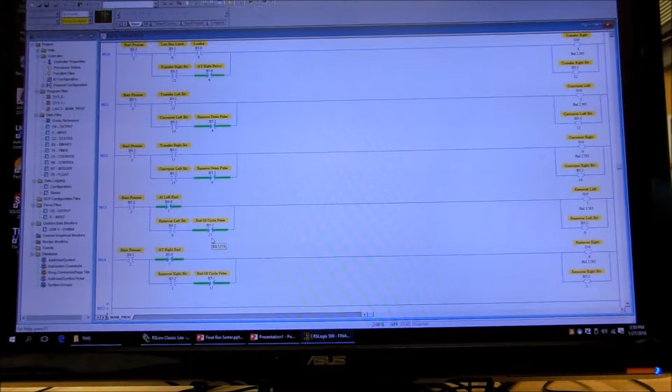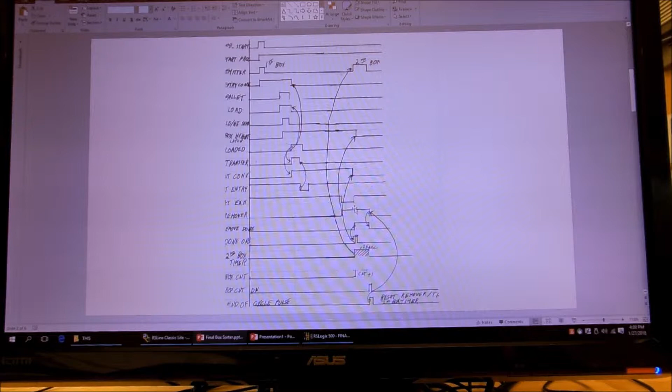Now, for the rest of this, what we have to do is say, okay, at what point do we say we have a remover on there? And if we look at this, again, the remover, we're going to keep this latched on, and when that at exit signal goes high right there, so they're both high right there, that's when we're going to say we're done. And so that circuit is just going to be when we're at the exit, and when we have the remover bit also.

Sure be nice if the Allen Bradley would cooperate a little better.

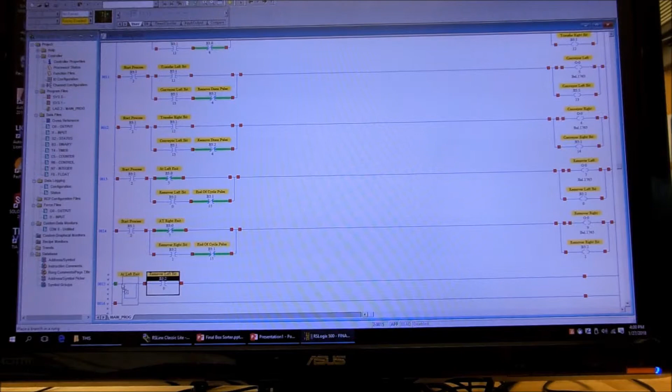And then it doesn't matter what, they're going to be a parallel branch because it'll either be left or right. So we can then say at the right exit and the right remover bit. And what we're going to do here again, now this is going to be a little bit different than what we had before because the signals go both high and low. So we're going to want to make sure that we're looking at the rising edge to be sure.

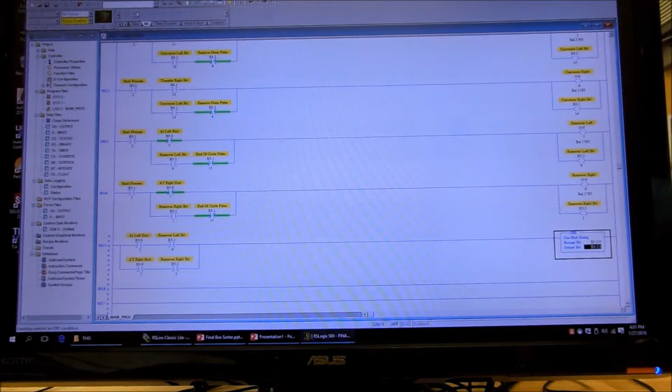And so what we're going to do is we want to grab our available bits. That's our memory bit. And the output bit is going to say, hey, that is when we are done, that's the remover done signal. So we're going to bring that down and use our remover done signal. And again, that's just a one shot. It's only going to be there for one scan.

And what we're going to do there is we're going to put in our counter circuit. And for our counter circuit, at the same time we're going to bring that over here, and then we'll move it into our output integer. So first let's set up our counter, and that'll be C5:0. Now our preset, we don't really care, so we'll just make it a really big number.

And then what we're going to do is we're going to move the, and remember, a couple people, it's nothing major, but remember, you're trying to move the accumulator. You're not trying to move just C5:0. So this will be going into our integer, and that's our box count.

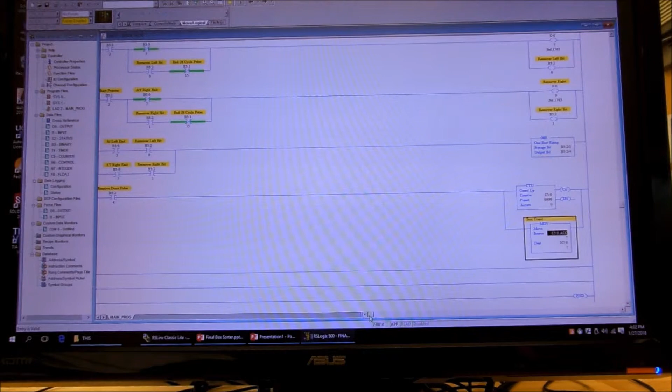And then, at the same time, we're also going to take that same signal, the remover done signal, and we're going to use that to set up our timer that we're going to use to actually time out the second box. So we're going to put a timer in there. We'll make that T4:0, and the time base here.

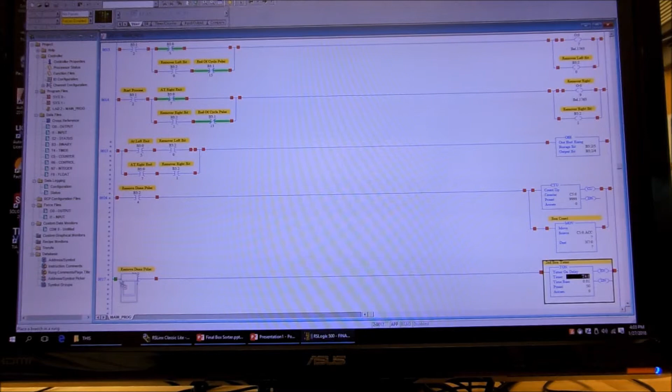Now, I never liked using 1 second as a time base. That's too granular, or not enough fine tuning. But I think around here, half a second will be plenty, so we'll make it 50. That's in hundredths of a second, so that's 50 hundredths. Now we're also going to have to go back, and we need to latch this, and we're going to use the enable signal for the timer to latch it.

So this will be going to use the enable signal, and for our actual second box bit we're going to use the timer timing signal, and that'll be for our second box. And somewhere one of our initial binary bits was for the second box. There it is. Okay, so now we've got our second box, and we're pretty much done, except we've got to

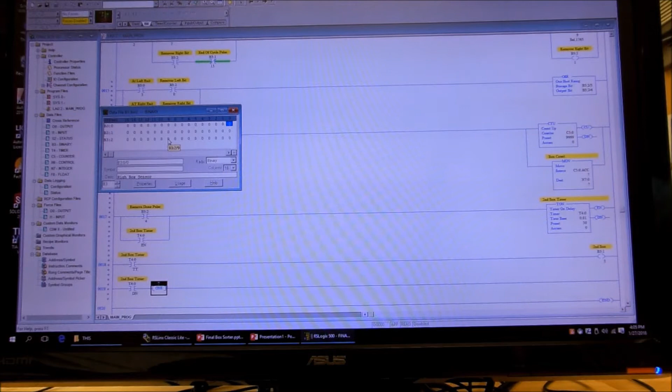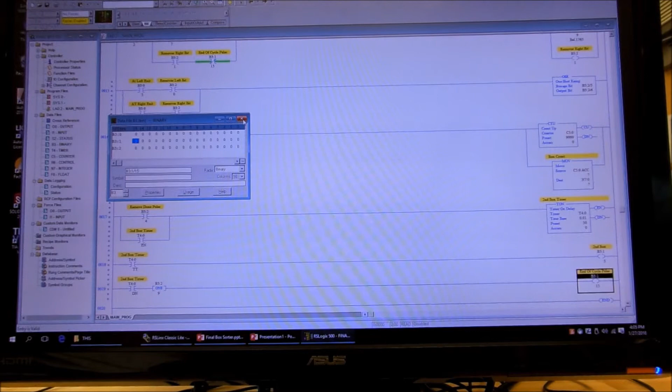add one more rung here, and that rung will be when our timer actually times out. And when that times out and that's done, that is going to be our end of the whole process for loading that. So we'll send that through a one-shot again. Send it through a bit, and that output is going to be our end of cycle, and I think we have that on 15. I always like putting the end of cycle on the very last of the output bits, bit 15, so I know where to find it fairly easily.

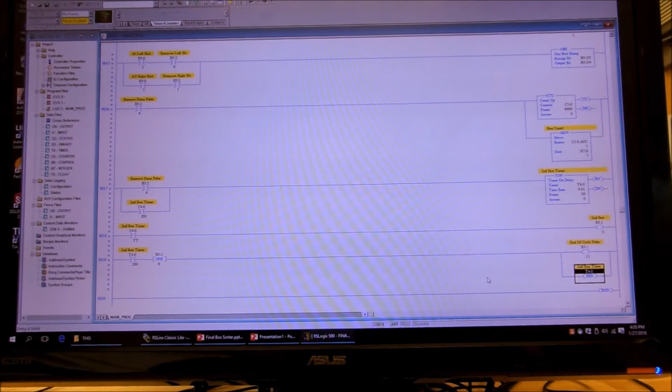And the other thing we have to do here is in parallel, once we do our end of cycle, it again is going to reset the removers, but we also have to reset our timer, because right now our timer is kind of latched up. So we're going to make that T4:0, and I think that ought to do it for our code.

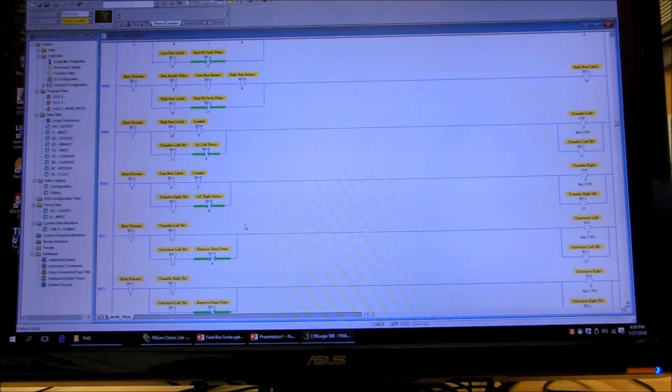Now, when you go through this, except for the very first part where it's a little bit different, where we're setting up the emitter, and especially when we get that first box with the push button thing, and box height is a little different, but as you look at all these signals, they're the same, and you can just copy and paste, and you get pretty good with Control-C, Control-V, and all you have to do is change the names from right to left. Left and right are the same, just the names have changed. And then you put what interrupts your circuit.

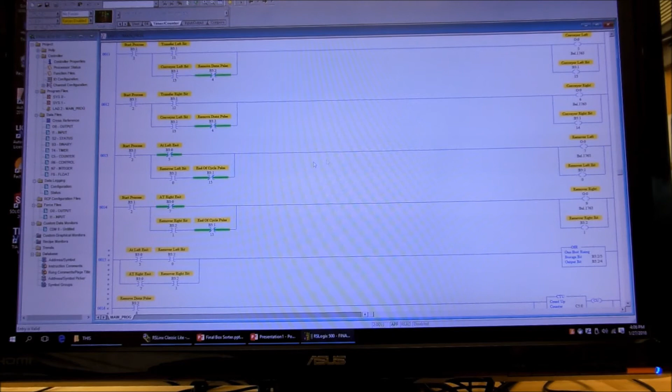For instance, when we're doing the conveyor, the signal that interrupts it is going to be the done pulse. And that's when the box actually disappears. That cuts off our conveyor. And then the remover, that's going to be the end of cycle. So all you have to do is set these up, and you've got it. So let's see, we'll just go in here and verify the project. Okay, so we've got no errors.

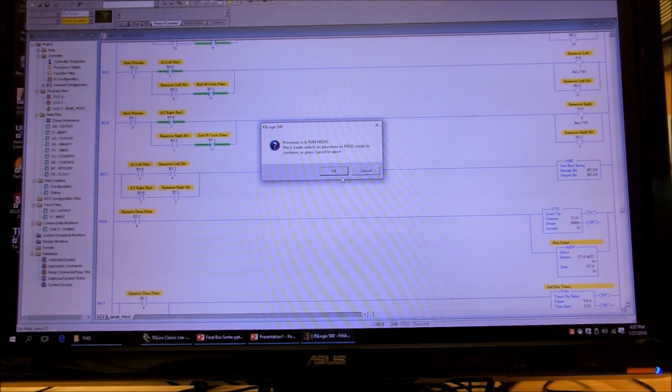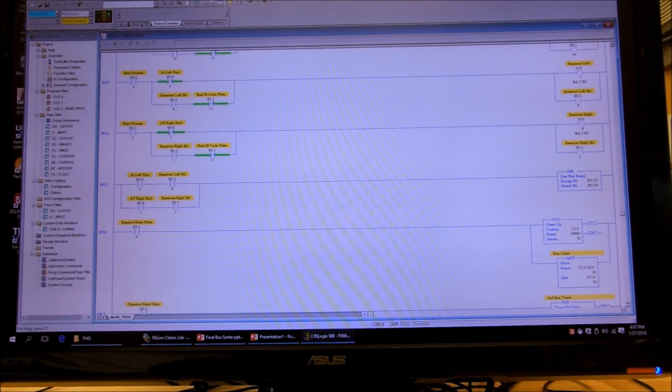We're going to download it into our machine, and once we do this, we're going to take a little break, and we're going to actually see what it looks like on the Factory I/O. So take a little break, and when we come back, we're going to set up the Factory I/O and take a look at that. And as soon as I get in run mode, the PLC can be running, and that'll be fine for when we set up the Factory I/O, so there's no big deal there. So next time, we'll be looking at the actual running of it and see how it works and if it works.